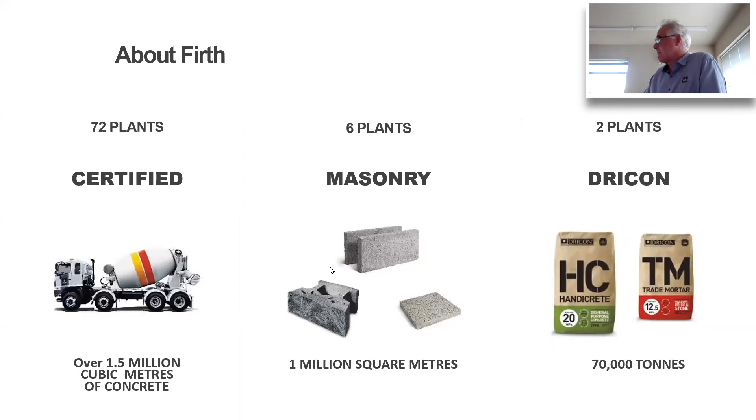Today, we're talking about low carbon concrete. Very quickly about Firth. Firth runs concrete ready-mix plants, masonry businesses, and bagged Dricon products. We're sort of the largest in each of the sectors. Therefore, we have a sort of an industry responsibility to lead the industry, and we take that very seriously.

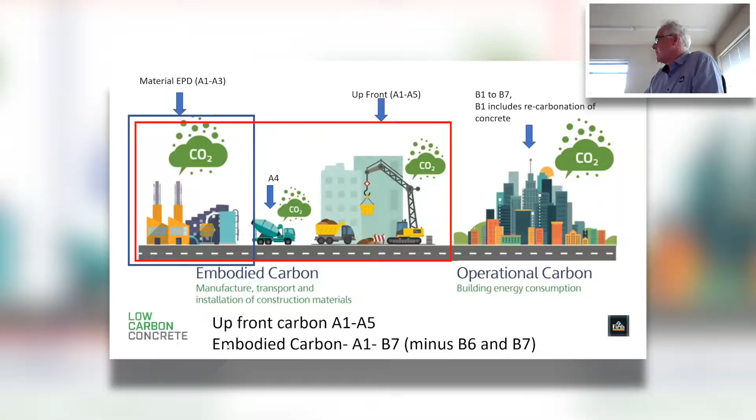As you're all aware, when we're doing our life cycle assessments, the A1 to A3 section is usually where a material EPD sits, and when I talk about our calculator and our EPD, it is cradle to the gate leaving our plant. What I'm finding interesting, though, is this slide, as we all do, stolen off the internet. I'm seeing the definition changing slightly, where embodied carbon is meant to mean both the construction phase and the operation, excluding the energy component of it. So I'm hearing A1 to A5, the red box, being described as upfront, and embodied as everything minus the operational energy use. So that's an interesting slight change I'm seeing.

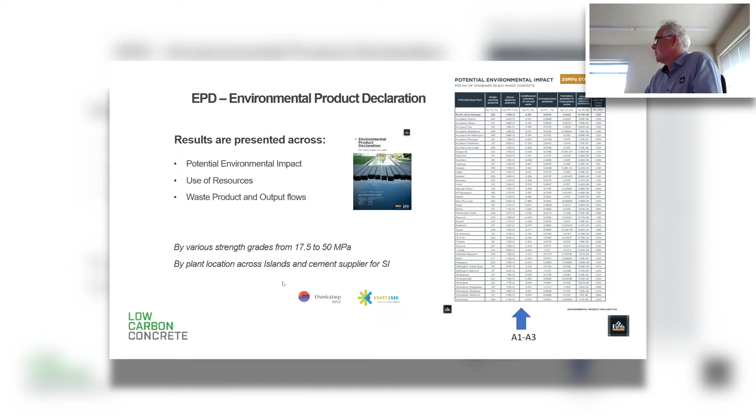So Firth worked with ThinkStep and Start2See to develop our EPD. And here is an example. It's live on the internet, public domain. You can download it. It gives you our EPD information for all our plants. This is an example for 20 MPa of all the North Island plants. There's another one for the South Island plants. When we did this, though, these are a summary of history. So it's FY19. We needed more than this. So when we worked with ThinkStep, what we asked them to do is also work on a calculator.

Now, other EPDs that inform our calculator are the Golden Bay EPD, which is public domain as well, and Winstone Aggregates, who supply a lot of our aggregates. They have only just released their EPD; it's hot off the press. And in each case, these are, I'd say, best of class in terms of their environmental performance.

Before we move on to the calculator, if you're doing life cycle assessments, when you're starting to look at the B1 section, you'll find that you can consider what's called carbonation. So concrete reabsorbs CO2 with time. If you go to EN 16757, there are lovely equations that you can use. Being an engineer, I love equations, but it is relatively significant. Per square meter, you would get about 5 kgs absorbed over 90 years, which when you start multiplying by large numbers of square meters becomes significant. And about 15% of the CO2 in the concrete can be reabsorbed.

Interestingly enough, when people start talking about road maps and footprints, they often look at all the concrete that was existing. And this outfit in Europe that has been working with the IPCC, for New Zealand, it would be of the order of about 70,000 to 130,000 tons of CO2 sequestered each year by all the concrete that we've poured before. Not really an LCA issue, but an LCA issue can be the end of use.

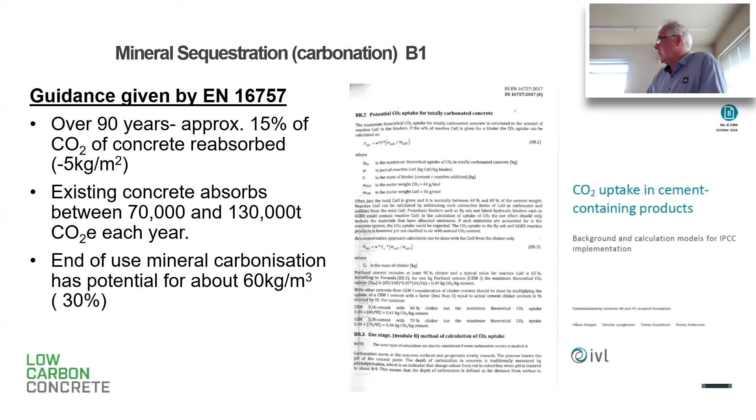If you take concrete and crush it right up, it will have never done its complete absorption that it's able to do. And there's a potential of about another 60 kgs per cubic meter if you have some sort of end-of-life processing. A lot of work's being done in this area, and that's probably about 30% of the original footprint. So onto the topic, carbon calculator.

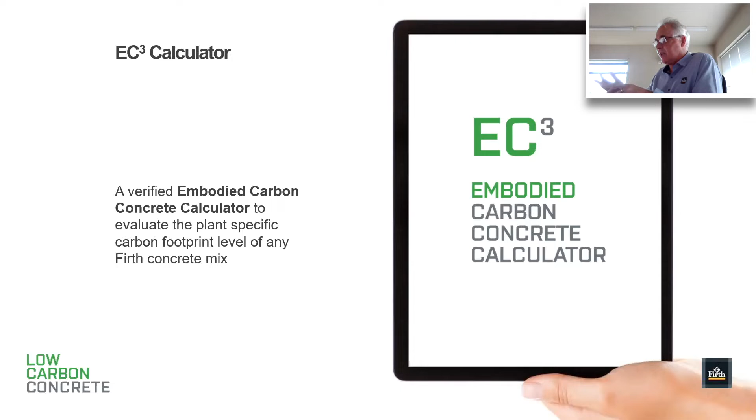As I say, we did our EPD, but we didn't want something that just sat on the shelf. What we wanted is something that was live. We have really experienced and skilled engineers that are very skilled at making sure that you get the lowest cost and the performance you required. With this calculator, it allows them also to look at the carbon footprint as a decision-making thing.

What it does is we can select the plant. We've got, as I say, 72 odd plants around the place, put in a mix design and the ingredients, and look at using supplementary cementitious materials, different sources of cement, different sources of aggregates, and it will come out with our carbon footprint. It allows our engineers to work now on strength, cost, and carbon performance, making rational decisions there.

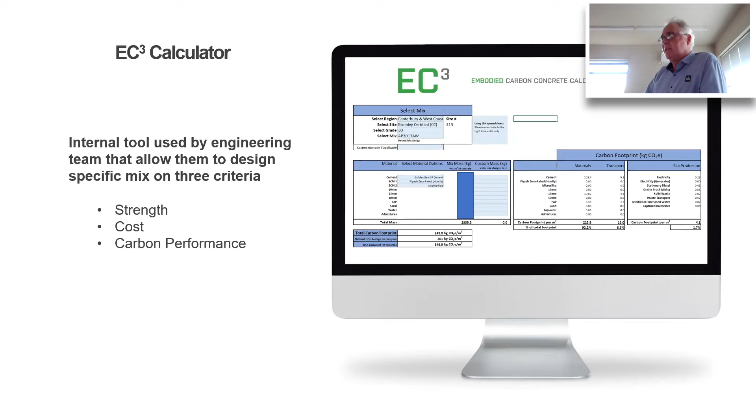Because with concrete, you'll often find that there's a specific need, and therefore you tailor it for that need. So this starts to allow us to look forward rather than back. And with it, we were able to present a certificate. It's in the form of an EPD, but it's not quite an EPD because it's something you're about to produce. It will pull through the name of the concrete, and it will provide you with all those environmental impacts that you would see in an EPD.

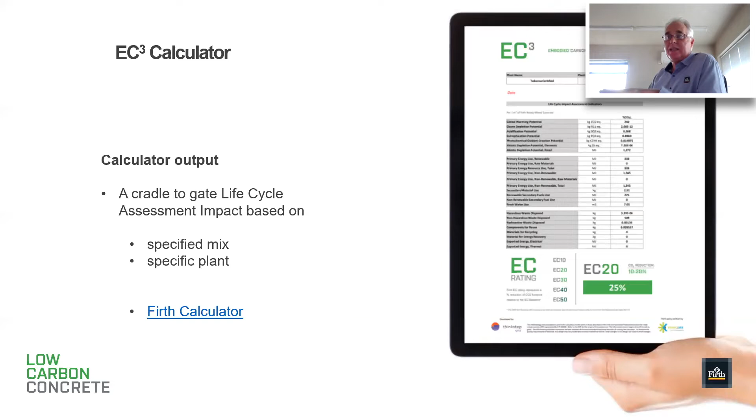And then because we find that most people are not that keen on numbers, we started to develop a little rating system. With this one, because it's 25% lower than the baseline, and I'll explain the baseline later, we call it an EC20. So anything that's 20 and above gets rated as EC20, so that people can specify concrete rather easily. I want a 30 MPa EC20 mix, and that means something to everybody. I'll go into a little bit more detail in the next couple of slides.

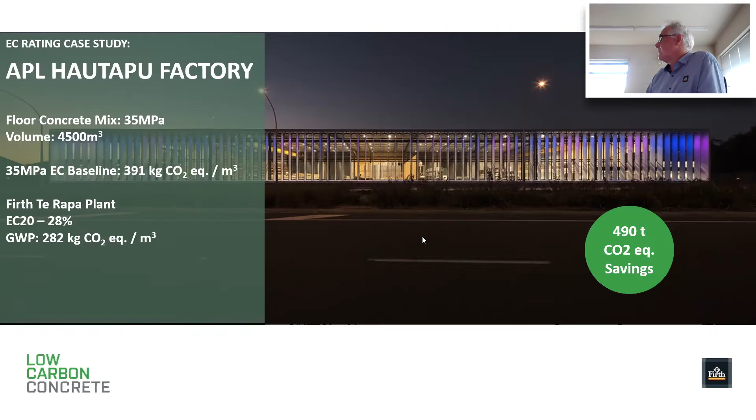How can this impact? Here's an example of a job we recently did. It had 4,500 cubic meters. We developed a mix in consultation with the team that was about 28% better than the baseline. And so almost 500 tons of CO2 was saved through that process of consultation, coming up with the correct mix. So what is this EC rating?

All we've simply done is we've taken the various strength grades, and with concrete, the higher the strength, the more cement you need to put into it to give you that strength. Therefore, the higher the footprint. We picked a baseline, and at the time, NZTA were doing a lot of work with the Infrastructure Sustainability Council, of Australasia at that time. We picked their 2020 baseline, put in the strength, and that gave us a baseline. And then we simply said EC10 is 10% better than that, EC20 is 20% better than that.

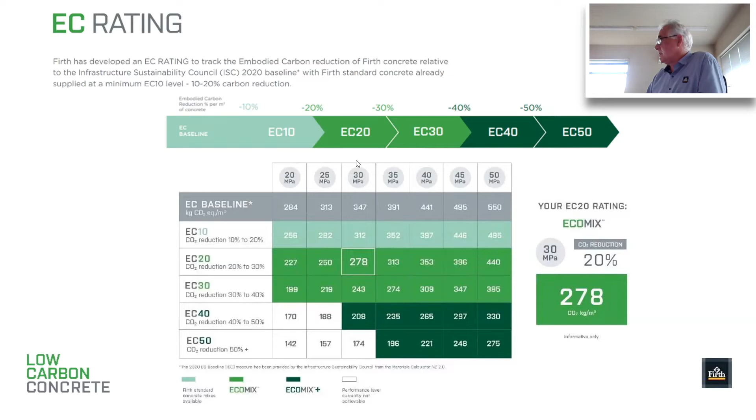So that means that if you wanted to order 30 MPa concrete that was an EC20, then our challenge would be to make sure that it was at least 30 MPa strength, and the carbon footprint as calculated using our calculator was less than, in this case, 278. What that means is it becomes performance based. It's not people saying put in this material or doing something like that. You're setting a performance criteria, and then we find the best and most sensible way of achieving that challenge.

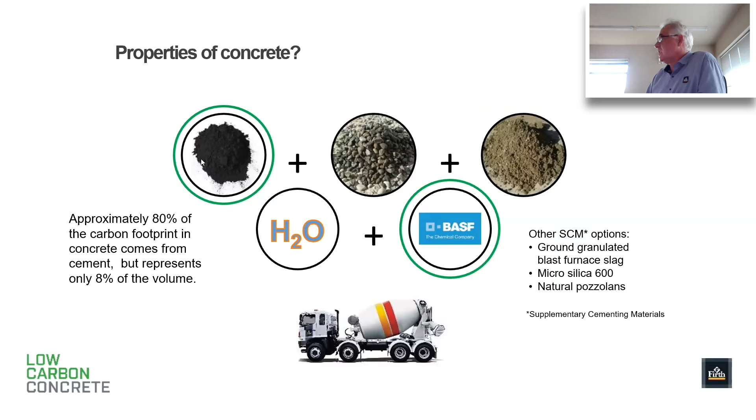So how do we achieve that? Concrete is basically cement, coarse aggregates, sand, water, and some admixtures. And it's these two that are ringed in green where we have the levers to do some work. Although cement only represents about 8% of the concrete by volume, it's about 80% of our footprint. So a lot of it is focused on reducing the cement content.

First thing you do is you find the best cement you can, and Golden Bay is the sole New Zealand manufacturer, and we should be proud of their footprint. They've done a lot of work over the years. Their global warming potential, and the difficulty for people comparing cements is they're not all the same strength.

So I would describe Golden Bay cement as a full strength or high strength cement, which means I don't have to put much in my concrete to make my concrete strength. And it's got a global warming footprint of 732, and this number is going down. They've done a lot of, this is historic again, done a lot of work on alternative fuels. They've done a lot of work using close to half, I think, of New Zealand's tires shredded and put through the plant. Doesn't do much for the carbon footprint, but does a lot for you if you've got a mountain of waste tires next door to you. But this number is going to be much lower than 732.

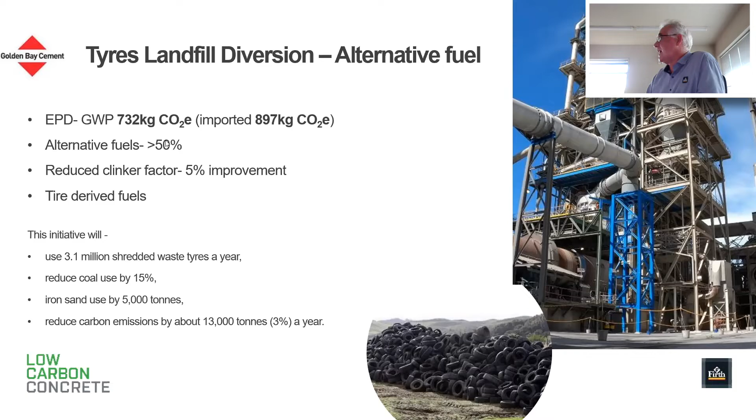Comparison, the imported cement, and this is really good cement. This comes out of Japan, high quality plant, 897. That just shows you how good this number is. So first strategy is get really good cement. Second strategy is to look at supplementary cementitious materials. We can use fly ash, we can use silica fume, we can use some natural pozzolans, and we can use something called ground granulated blast furnace slag. There are others. They come with pluses and minuses.

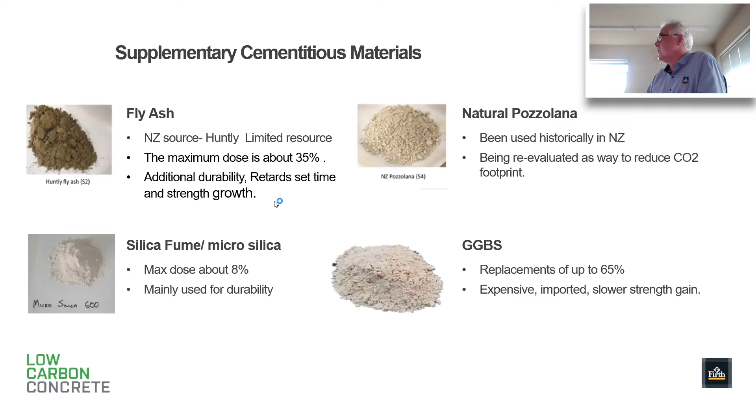The advantages of that EC rating type process I was talking about is it becomes the concrete supplier's responsibility to find out which one of these are. But each one of these has the ability to reduce your cement needs and therefore reduce your carbon footprint. And the calculator we've got can take those into account.

Where's the world going? In New Zealand, we're looking at our roadmap, but this is one for the Global Cement and Concrete Association. People are looking at how I change my clinker to reduce the amount of clinker that I have in cement. How do I get more efficiency in concrete production? Not a big issue for us, decarbonisation of electricity. Carbon sink, I've done calculations and I suspect our carbon sink of existing concrete is around about 9%. Using supplementary cementitious materials will be bigger for us.

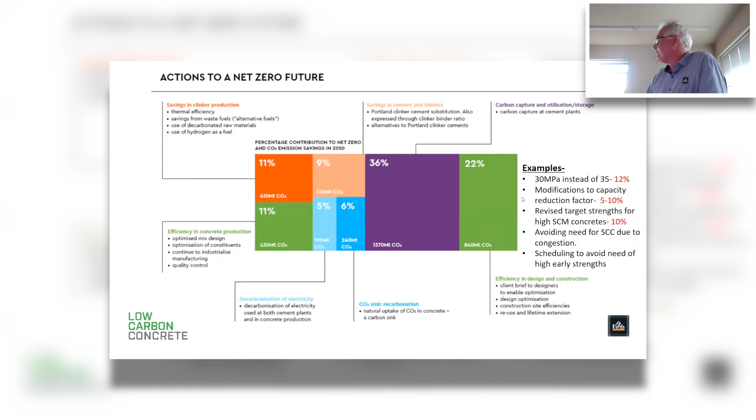Recarbonisation, carbon capture and utilisation, this big chunk here, is something that a lot of the industry's looking at the moment. And I'm hoping that in the next 10 years or so, that starts to become less prototype and more full on. And there's the design industry looking at various ways of improving our standards, etc., to remove conservatism and get efficiencies that way. So you can see that there's a big picture in how to achieve it. And that big picture involves lots of different sectors and everybody doing their little bit.

Really good point about how embodied carbon is now really being considered to not just be the upfront emissions in the materials. It's to do with the fact that when you specify that material, you need to account for the fact that whatever then happens to it during life, whatever it needs during its life, is built in at the start. So if we specify concrete, whatever it needs during its life you have to account for at the point you put it in. It's not just going to vanish. So yes, there's a lot of different terms coming up, but certainly the upfront for A1 to A5 I know is favoured by NZGBC as well. And yeah, useful to understand.

I love the concept of specifying by carbon reduction. That just makes it so easy. And my first question is, what's the reaction from specifiers and from customers? How's that landed? Really good, because what we've done also is people say, how do I specify? So we've gone on to Masterspec, which is a resource for designers, and written specifications there that say this is how you do it. And what I quite like, because Firth being the largest has some responsibilities around leadership, is we live in a very competitive industry. So you just say, here's the targets, everybody go out and find the best way of doing it.